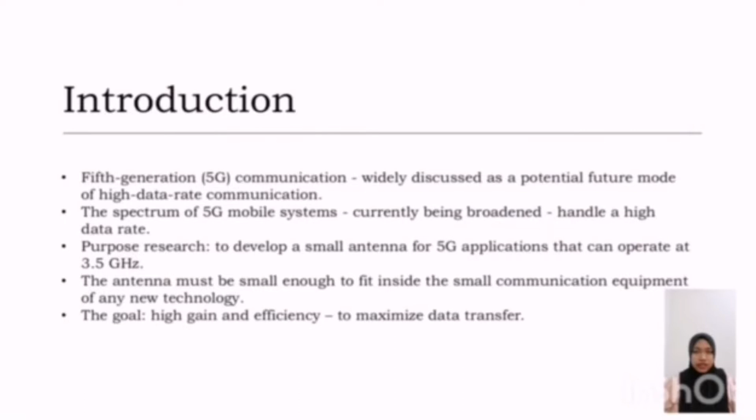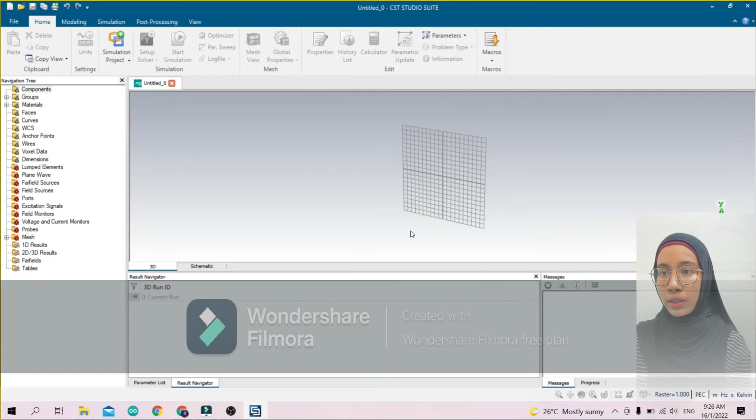Okay, first of all, we will open the CST file, tick, and then antenna, planar, time domain, and this one is frequency minimum 2, frequency maximum is 4.5, E field, H field, and far field, for default is 3.5. I need to wait for a while. As you can see here, it's a cubic. If I turn around, you can see all the sides are equal.

All for the working plane. And I click brick and name it as sub. Negative A per 2, B per 2, A per 2. And for the Z max is H. For the material, we need to use FR4.

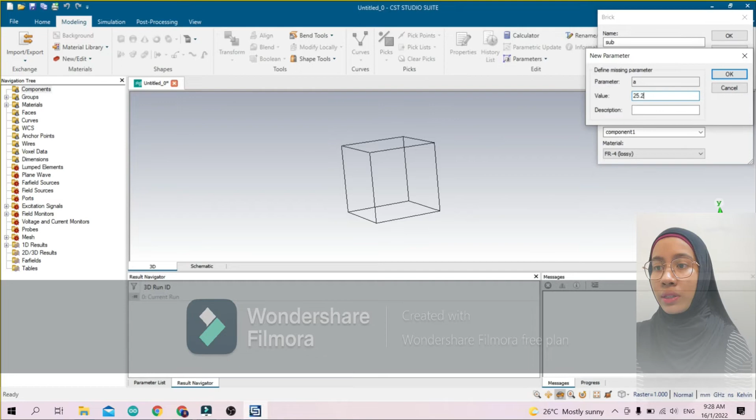Add one more brick for rectangular. For X minimum, A over 2 minus 11.5 because we want to have an equal rectangle. And for X max, A over 2 minus 18 minus 6.5, Y minimum negative 22. And for the parameter is 0.035.

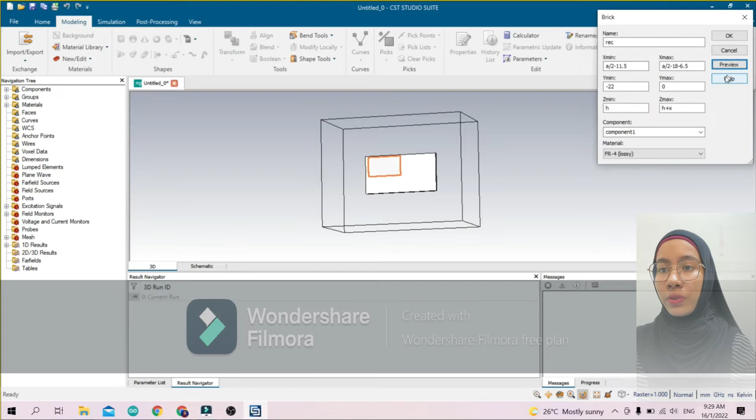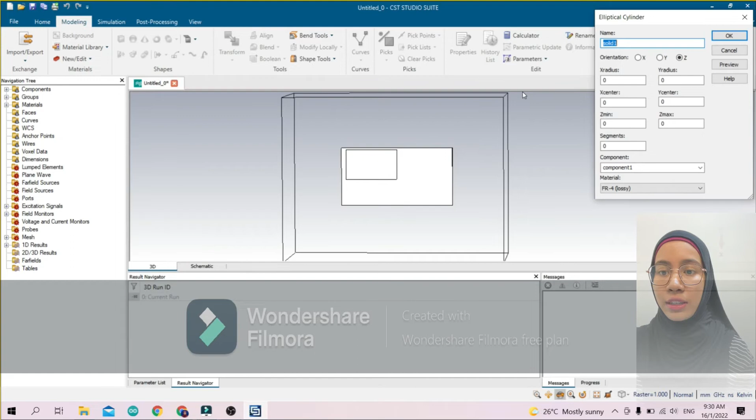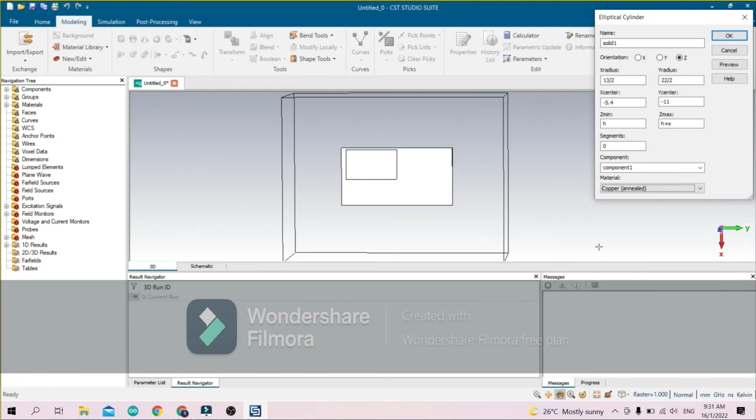Cylinder shape, and then choose elliptical, elliptical cylinder, and then choose elliptical cylinder. And then rename as AEL. Okay, then I add one more brick.

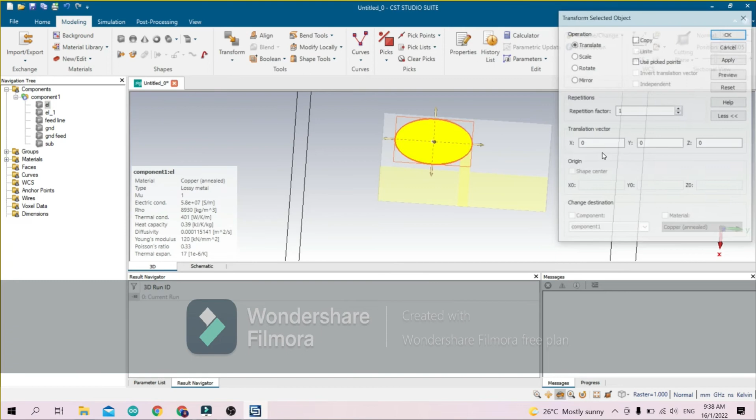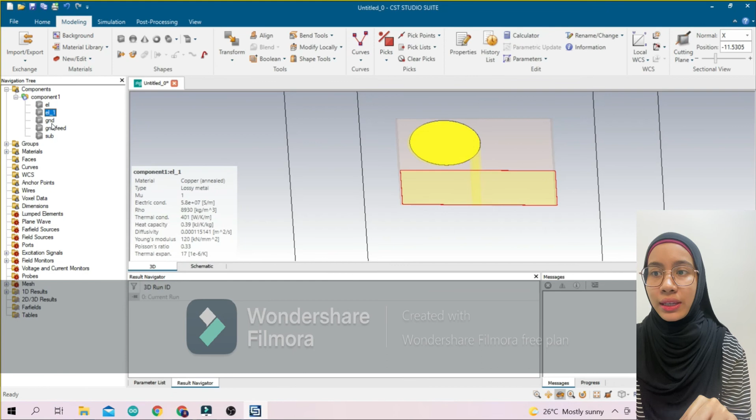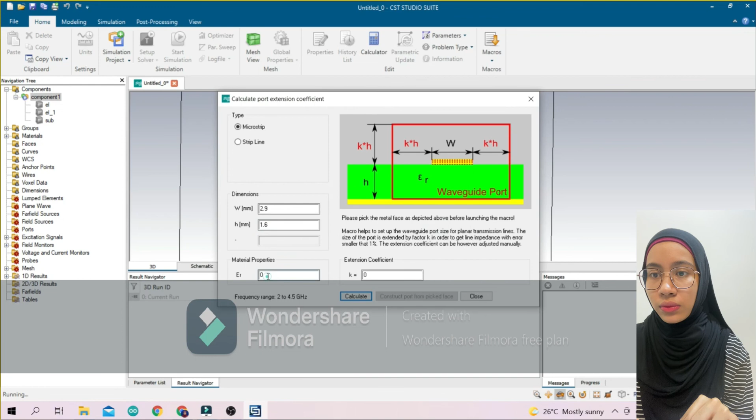Conclusion. To sum up, a tiny elliptical antenna has been built for use at 3.5 GHz for 5G applications in this project. The antenna physical dimensions are 25.2 times 45 mm square. At 3.5 GHz, it has a return loss of 32.219 dB. The gain of the antenna is 5.01 dB. The antenna's efficiency is quite high, which is at 96.25%.